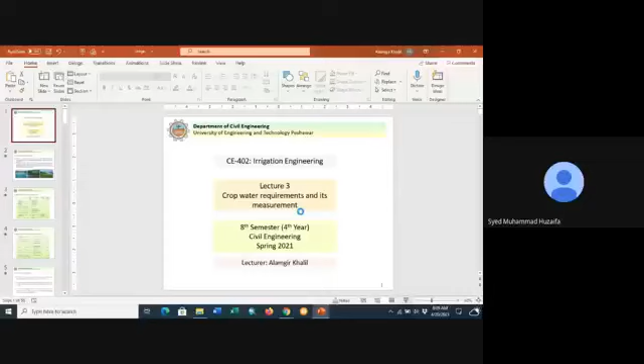This is lecture number 3 of the course Irrigation Engineering. In today's lecture, we will discuss the crop water requirements and its measurement.

Water requirements of crops. The term water requirements of crops means the total quantity and the way in which a crop requires water from the time it is sown to the time it is harvested. This is known as the water requirements of crops.

Different crops have different water requirements, and the same crop may have different water requirements at different places of the same country, depending upon variations in climate, type of soil, methods of cultivation, and useful rains that fall over the crops during the growth period.

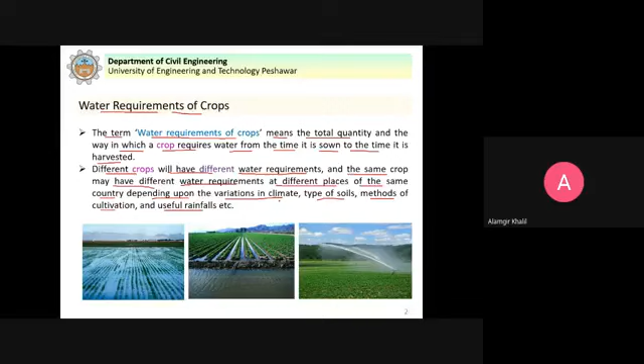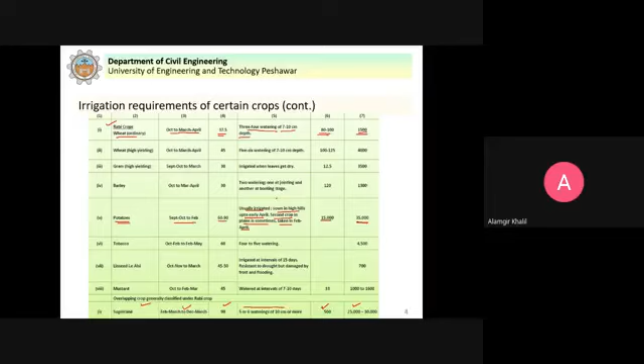Similarly we have sugar cane, grown from February, March to December or March - almost grown for the entire year. The average water depth required is 90 centimeters, with 5 to 6 waterings of 10 centimeters or more required. Seed required is 500 kg per hectare, and crop yield is 25,000 to 30,000 kg per hectare. This is general information on the irrigation requirements of certain crops, to get some idea.

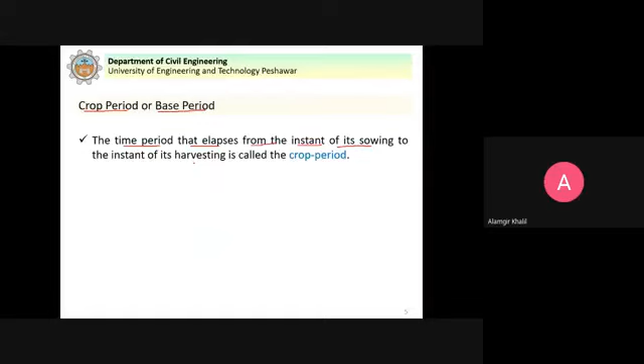Next we discuss the crop period or base period - some basic concepts. The time period that elapses from the instant of sowing a crop to the instant of its harvesting is called the crop period.

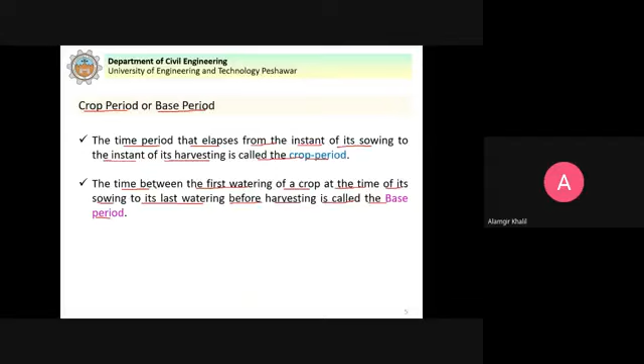The time between the first watering of a crop at the time of its sowing to its last watering before harvesting is called the base period.

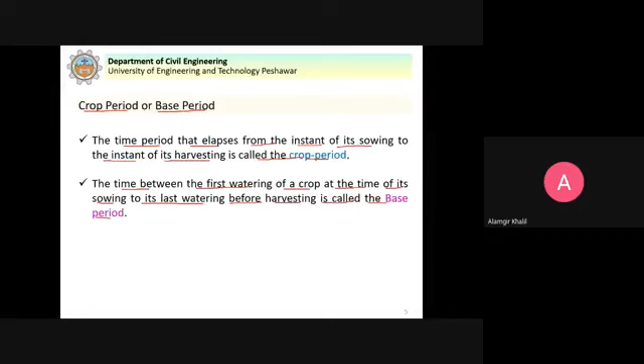There is a slight difference between the crop period and base period. Crop period is the time that elapses from the instant of sowing a crop to the instant of harvesting. Whereas the time between the first watering at sowing to the last watering before harvesting is called the base period. So the crop period is slightly more than the base period.

But for all practical purposes, they are taken as one and the same thing and generally expressed in B days. So B days denotes the crop period, and the base period is practically considered the same, denoted by B days.

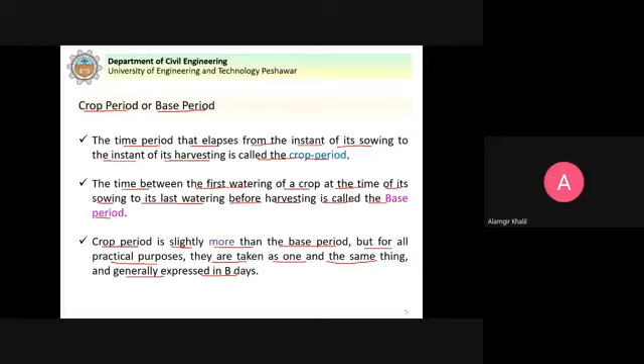Next, we discuss delta of a crop. Each crop requires a certain amount of water after a certain fixed interval of time throughout its period of growth.

Just like we saw in this table, maize has an average water depth required of 45 centimeters, and it has to be provided with irrigation requirements, the artificial supply of water for its growth, which is 4 to 5 waterings.

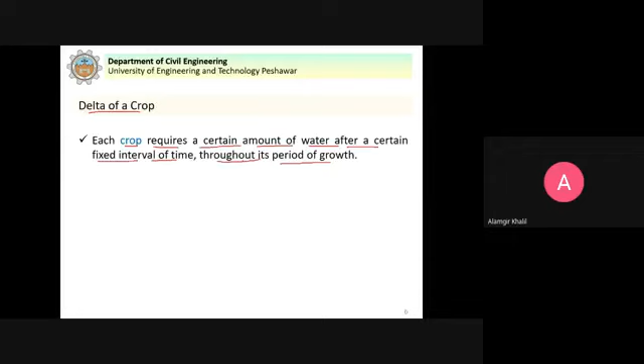Each crop requires a certain amount of water after a certain fixed interval of time throughout its period of growth. The depth of water required every time generally varies from 5 to 10 centimeters depending upon the type of crop, the climate of that area, and the soil conditions.

The time interval between two consecutive waterings is called the frequency of irrigation, and it is also known as the rotation period.

The total depth of water in centimeters required by a crop to come to maturity is called its delta. This is known as delta of a crop.

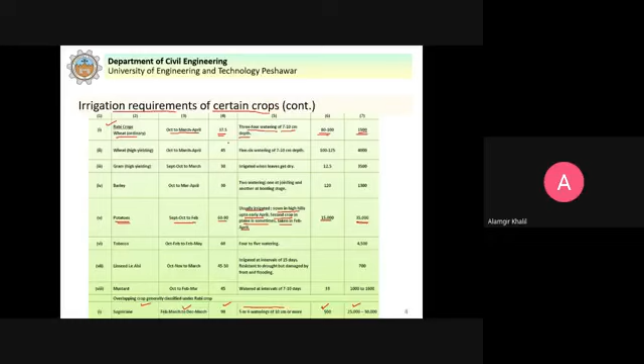For example, wheat requires 37.5 centimeters of water on average, so this is the delta for wheat. The total depth of water in centimeters required by a crop to come to maturity is called its delta.

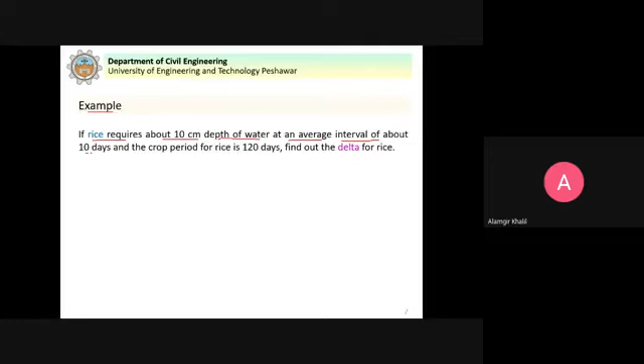For example, if rice requires about 10 centimeters depth of water at an average interval of about 10 days, and the crop period for rice is 120 days, find out the delta for rice.

Water is required at an interval of 10 days for a period of 120 days. Therefore, the number of required waterings will be 120 divided by 10, which is 12 waterings required.

Total depth of water required equals the number of waterings multiplied by the depth of each watering, that is 12 multiplied by 10, which is 120 centimeters. Hence the delta for rice is 120 centimeters, the total depth of water required by rice to come to maturity.

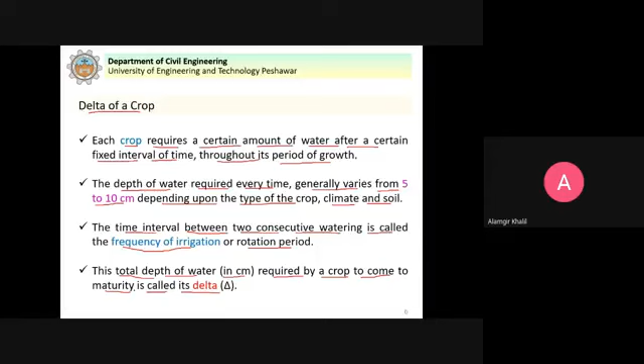Average approximate values of delta for certain important crops. For sugarcane, delta on field is 120 centimeters or 48 inches. For rice, it is again 120 centimeters or 48 inches. For garden fruits, 60 centimeters delta on field.

For cotton, 50 centimeters or 22 inches. For vegetables, delta on field is 45 centimeters or 18 inches. For wheat, it is 40 centimeters or 16 inches. For maize, 25 centimeters or 10 inches, and other crops.

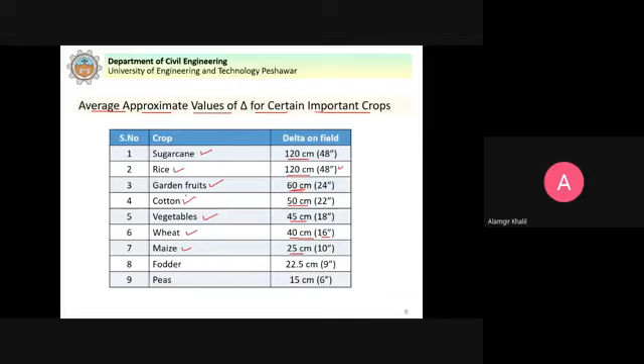So this is the delta, the total depth of water required for these crops to come to maturity. During the growth period, this is the total depth of water required for their full growth.

Next, we discuss some important units, starting with the acre foot. We have an area of 66 by 660 feet. This is 1 acre, which equals 43,560 square feet.

Now, if we have water over this area to a depth of 1 foot, this becomes an acre foot, which is the unit of volume. So 1 acre foot is equal to 43,560 cubic feet, the unit of volume.

In the previous lecture, we discussed this unit in detail when we covered the water budget of Pakistan, using million acre feet, where million is 10 power 6 and acre feet is the volume unit. So 1 acre foot equals 43,560 cubic feet. We have 1 acre, and if we have a depth of water over this acre, that volume is known as 1 acre foot.

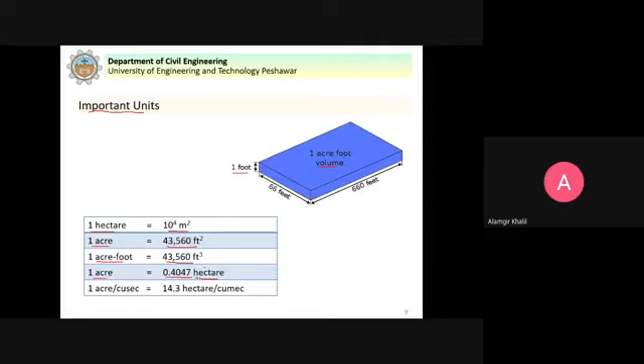Similarly, 1 hectare is equal to 10 power 4 square meters. And 1 acre is equal to 0.4047 hectare. This is how we can convert from hectare to acre and acre to hectare.

Next, we discuss duty of water. The duty of water is the relationship between the volume of water and the area of crop it matures.

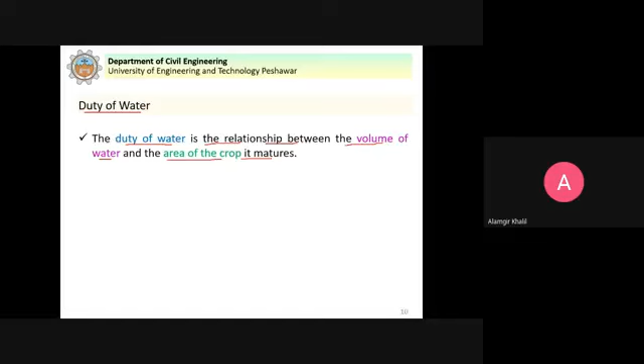How can we define it? It may be defined as the number of hectares of land irrigated for full growth of a given crop by supply of 1 cubic meter per second of water continuously during the entire base period of that crop.

So this is the duty of water. We can also define it in the FPS system as the number of acres of land irrigated for full growth of a given crop by supply of 1 cubic foot per second, 1 cusec, of water continuously during the entire base period of that crop. This means that for unit discharge of water flowing for B days, the base period of that crop, it matures D hectares of land.

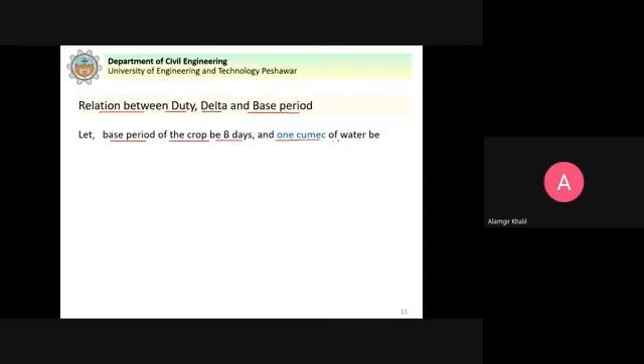Now we look at the relationship between duty, delta, and base period. Let the base period of the crop be B days, and 1 cumec of water be applied to this crop on the field for B days. The volume of water applied during B days will equal B multiplied by 24 hours, multiplied by 60 minutes, then 60 seconds, since B is in days.

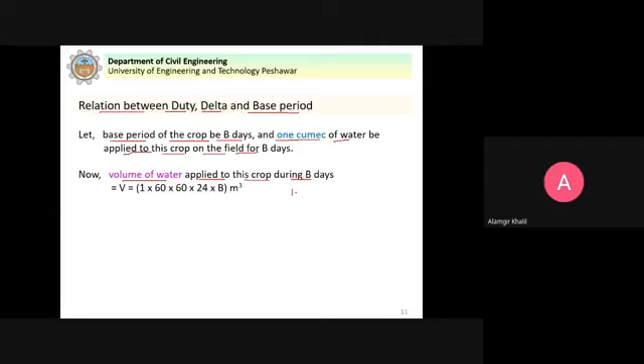The idea here is that we have, for example, 1 cubic meter of water. This is the volume, and this is for 1 second. So this is 1 cumec of water.

Now we want to find the volume for B days, if it is flowing for B days. That will be equal to 24 multiplied by 60 multiplied by 60, giving us the volume in cubic meters, which equals 86,400 times B cubic meters.

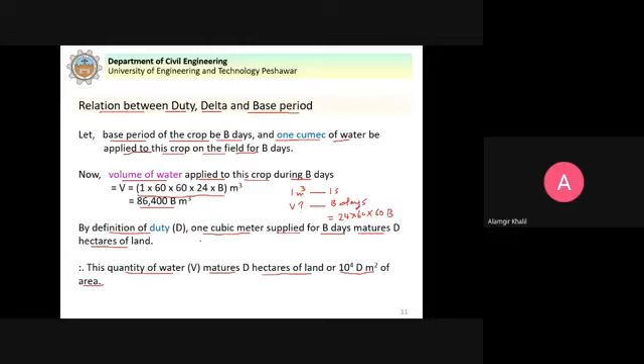Now, by definition of duty, 1 cubic meter per second supplied for B days matures D hectares of land, or 10 power 4 into D square meters of area. So the total depth of water applied on this land is simply equal to volume divided by area. We have this volume and this much area, so by definition, this total depth of water is called delta.

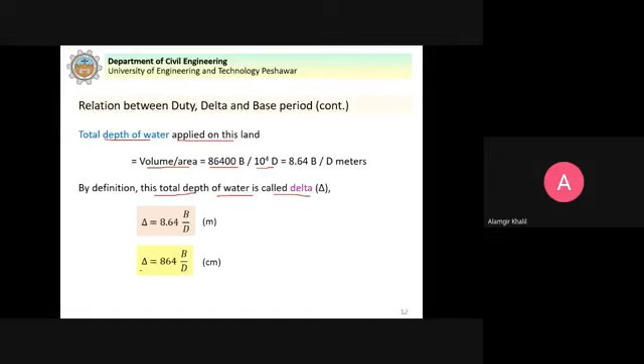So delta is equal to 8.64 B by D. This delta will be calculated in meter, or multiplied by 100, so delta is equal to 864 B by D in terms of centimeter. So delta is in centimeter, B is in days, and D is the duty in hectares per cubic meter per second.

This is the relationship between the duty of water, delta of crop, and the base period of the crop. In the FPS system, we get this relationship for delta: delta is equal to 1.983 B by D, or approximately 2 into B by D. So delta will be in feet, B is in days, and D is the duty in acres per cubic foot per second.

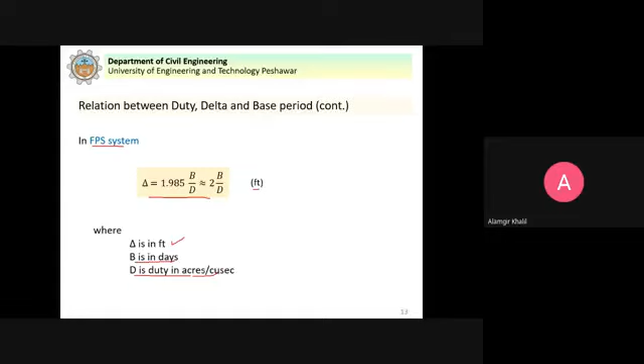Next, we discuss factors affecting the duty of water. The first factor is the type of soil.

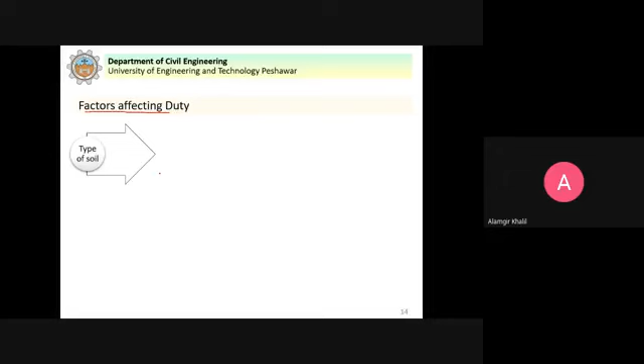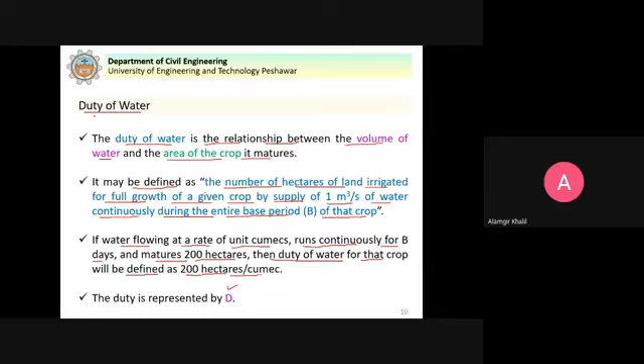So we have coarse grained soil. Percolation losses will be high, and this will result into low duty. When water is lost, the area that it will irrigate will decrease, so it results into low duty. The duty definition is the number of hectares of land irrigated for full growth of a given crop by supply of unit discharge continuously during the base period. So if there are losses, the number of hectares of land irrigated will decrease, which will decrease the duty of water.

So we have coarse grained soil, percolation losses are high, and this will result into low duty. Fine grained soil has less percolation losses, and this will result into high duty of water.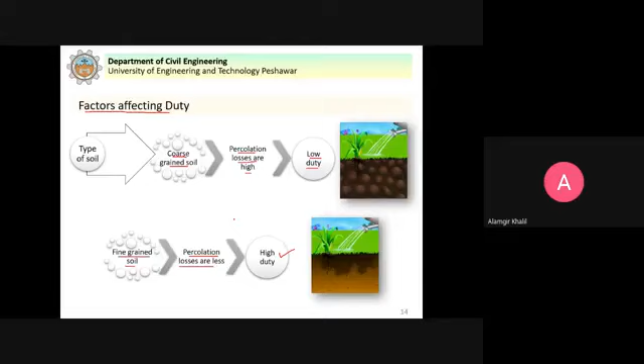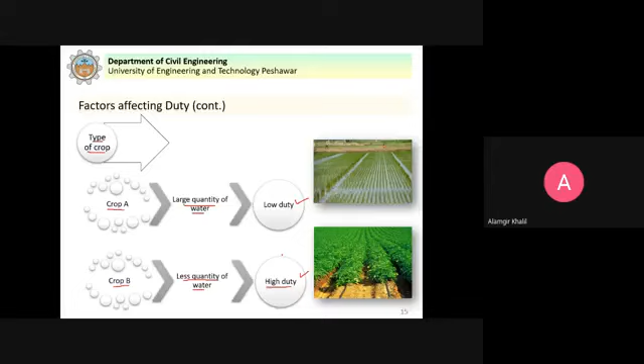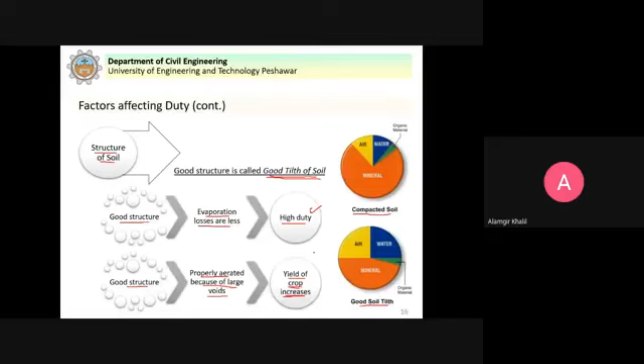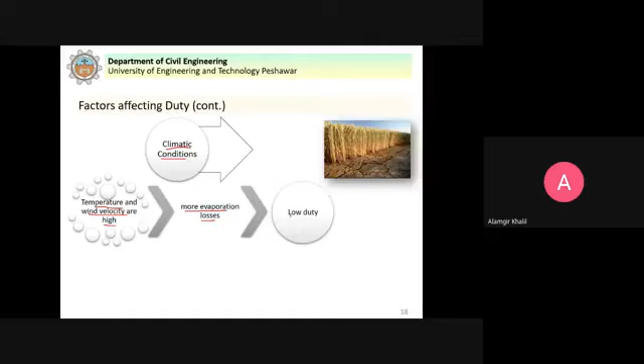Next we have climatic conditions. When temperature and wind velocity are high, this results into more evaporation losses, and as more water is evaporated, this results into low duty. If we have rainfall during the base period, there is less irrigation requirement, meaning high duty of water, because during rainfall the crops already get some water, so less quantity of water is required to bring it to maturity, meaning less irrigation requirement and high duty.

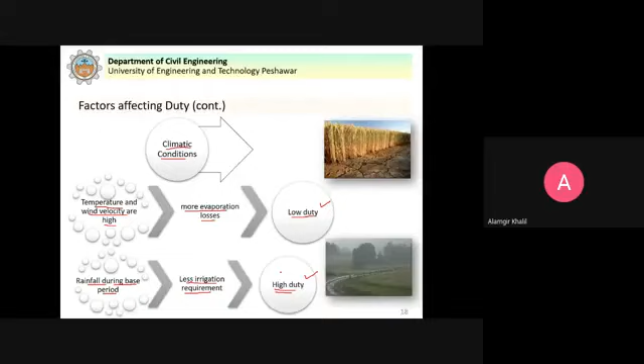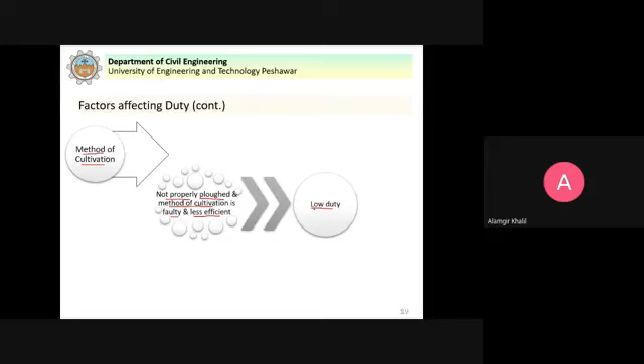Method of cultivation: if the land is not properly plowed, and the method of cultivation is faulty and less efficient, this results into low duty of water. If land is not properly prepared for cultivation, proper irrigation cannot be done, resulting in low duty. If properly plowed and made quite loose, water retention capacity increases, the number of waterings required reduces, and this results into high duty of water. That's why land preparation during sowing of the crop, and then supplying water to the crop, is very important.

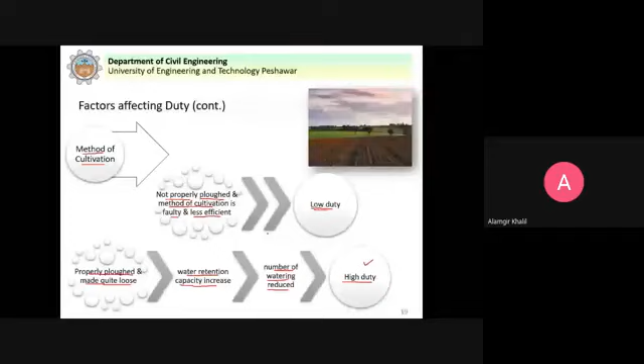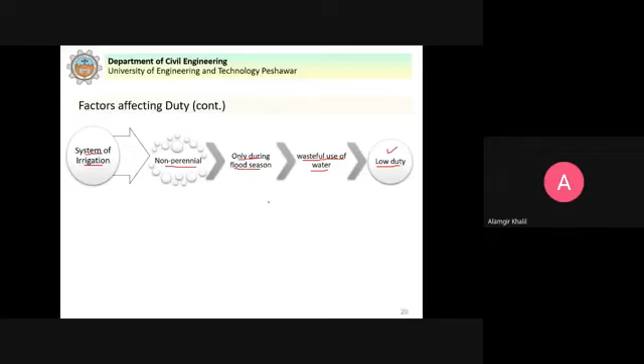System of irrigation: non-perennial versus perennial. Perennial means water is continuously flowing, while non-perennial means water is not continuously flowing and is only available during flood season. Wasteful use of water can result in low duty. When we have a perennial system where water is available in adequate quantity throughout the base period, water application throughout the growth period keeps soil continuously wet and less quantity of water is required, resulting in high duty of water.

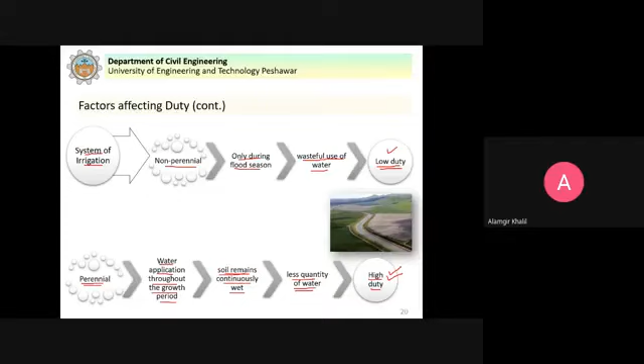During the flood season, we supply more water than is actually required. This results in wasteful use of water and consequently a low duty of water. But in a perennial system, we already have the water that we can supply, so the soil remains continuously wet. This results in less quantity of water being used and a high duty of water.

For application of water, we have the drip irrigation system, which is the most efficient and results in very high duty of water. As we studied in the previous lecture, in drip irrigation, through a network of pipes we supply water directly underneath the plants and crops. This results in saving of water, so it is most efficient and consequently has a very high duty of water.

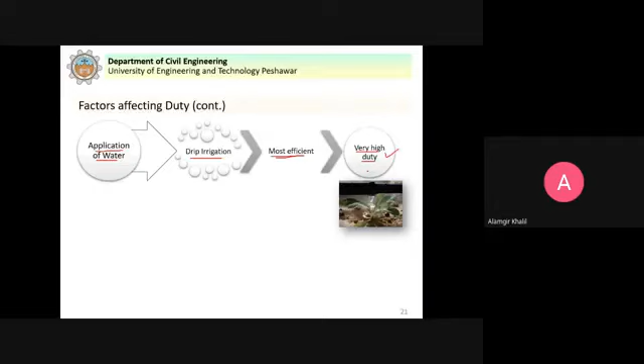For the sprinkler irrigation system, where we sprinkle water over the crops, seepage losses are reduced as compared to flooding techniques. This sprinkler irrigation is in the form of artificial rain and results in high duty, though it is less than the drip irrigation system.

Now the surface irrigation system, the flooding technique, where we flood the area of the crops with water, results in more waste of water and consequently a low duty of water. So these are some of the factors which affect the duty of water.

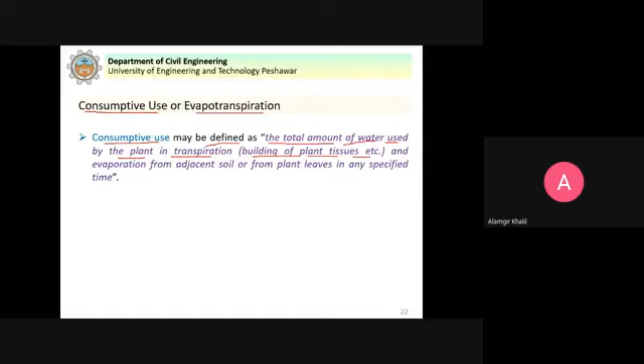Next we discuss consumptive use, or evapotranspiration. Consumptive use may be defined as the total amount of water used by the plant in transpiration, that is building of plant tissues, etc., and evaporation from adjacent soil or from plant leaves in any specified time. This is also known as evapotranspiration.

Consumptive use is the total amount of water used by the plant in transpiration, that is building of plant tissues, the water the plant uses for its growth, and evaporation from adjacent soil or plant leaves in any specified time. So what is the difference between delta and consumptive use? The delta of the crop that we studied is for the whole period.

That is, for the whole period of the crop growth, the total depth of water required during the entire growth period of the crop, that is known as delta.

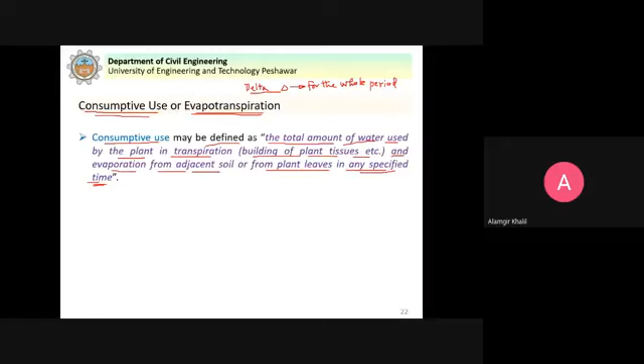The values of consumptive use may be different for different crops, and may be different for the same crop at different times and places, because crops require different amounts of water depending upon climate conditions and soil conditions.

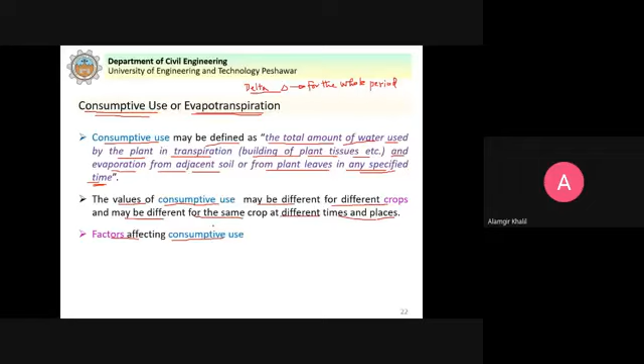Factors affecting consumptive use are the same factors on which transpiration and evaporation depend. For example, temperature: if temperature is more, evaporation and transpiration will be more, and consequently consumptive use will be more.

Sunlight: plants require it for building tissues through the photosynthesis process, so if sunlight is available, plant transpiration will be more. Similarly, humidity and wind movement matter - if there is more wind blowing, evaporation from the surface will increase because the wind takes away vapors, increasing the rate of evaporation.

Similarly, we have soil topography, precipitation, method of irrigation, and depth of water applied for irrigation. All the factors on which transpiration and evaporation depend, consumptive use or evapotranspiration will also depend on.

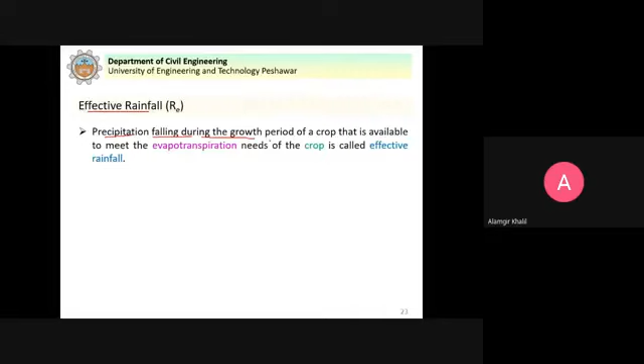Next, we define effective rainfall. Precipitation falling during the growth period of a crop that is available to meet the evapotranspiration needs of the crop is called effective rainfall. In irrigation, effective rainfall is that precipitation falling during the growth period of the crop that is available to meet the consumptive use, or evapotranspiration needs, of the crop.

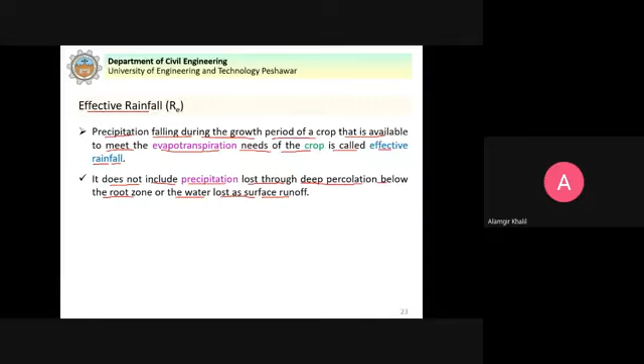It does not include precipitation lost through deep percolation below the root zone or water lost as surface runoff. So that part of the precipitation used by the crops in meeting evapotranspiration needs is known as effective rainfall.

This effective rainfall does not include precipitation loss through deep percolation, where water infiltrates into the soil and travels downward. This deep percolation joins the groundwater zone of saturation, below the root zone, because this water, if it travels vertically downward below the root zone, the plants will not be able to extract it. That's why it will not be part of the evapotranspiration needs, the water that the plant extracts. And the water lost as surface runoff.

In hydrology, you might have studied that we have total rainfall minus abstractions. Abstractions are all the losses, for example, the water infiltrated, evaporation, and other depression storages. So what was left appears as surface runoff. This was actually called effective rainfall in hydrology, that which appears as surface runoff.

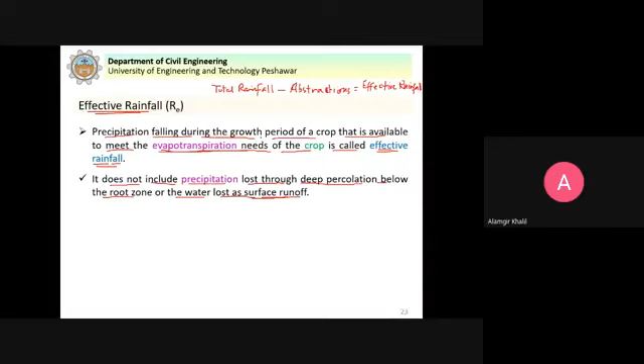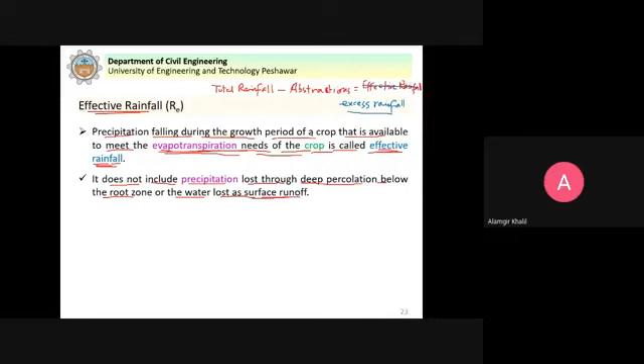But then there was a confusion, because in irrigation or agriculture, people say that effective rainfall is that part of the rainfall falling during the growth period of the crop that is available to meet the evapotranspiration needs of the crop. Consequently, in hydrology, we now call the runoff portion as excess rainfall, that is the rainfall that appears as surface runoff. And we reserve the term effective rainfall for precipitation falling during the growth period of the crop that is available to meet the evapotranspiration needs.

Next, we define consumptive irrigation requirement. It is the amount of irrigation water required in order to meet the evapotranspiration needs of the crop during its full growth. It is therefore consumptive use exclusive of effective precipitation, stored soil moisture, or groundwater. So it is the irrigation water that we artificially have to supply.

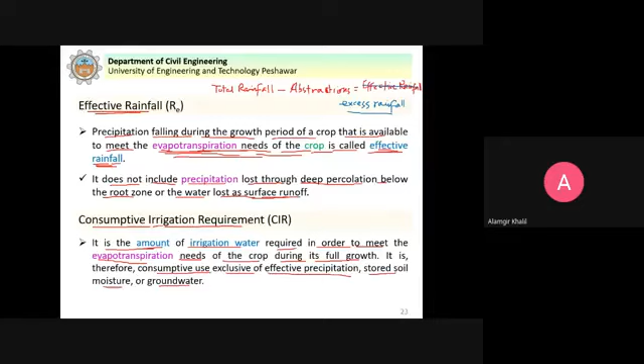So it is that amount of irrigation water required in order to meet the evapotranspiration needs of the crop during its full growth, the water that we have to artificially supply. That is known as consumptive irrigation requirement. It is therefore consumptive use exclusive of effective precipitation, stored soil moisture, or groundwater. So consumptive irrigation requirement is equal to consumptive use minus effective rainfall.

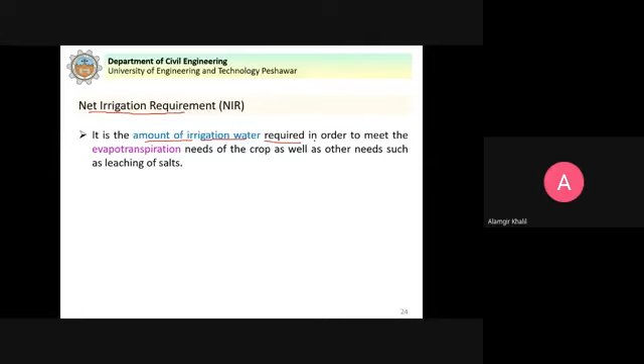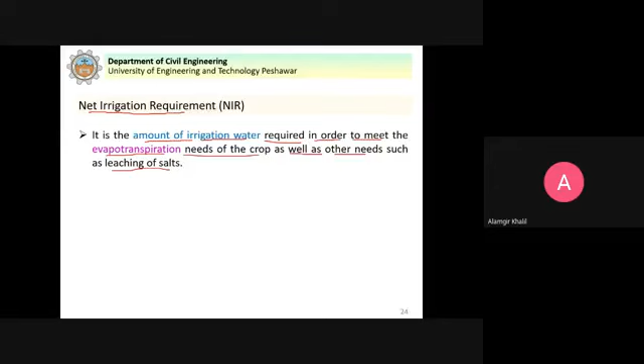Next, we have net irrigation requirement. It is the amount of irrigation water required in order to meet the evapotranspiration needs of the crop as well as other needs such as leaching of salts. So in addition to meeting evapotranspiration needs, we need to supply water for leaching of salts, removal of salts from the soil, because sometimes salts are present in the soil which are not beneficial, causing salinity, harmful salts.

So how to remove them? We have to provide additional water that can dissolve these salts, and then that water can be drained, either by surface drainage or subsurface drainage, to remove these salts. This is known as leaching of salts. So net irrigation requirement is the amount of irrigation water required to meet the evapotranspiration needs of the crop as well as other needs such as leaching of salts. It equals consumptive use minus effective rainfall plus water lost in deep percolation for leaching.

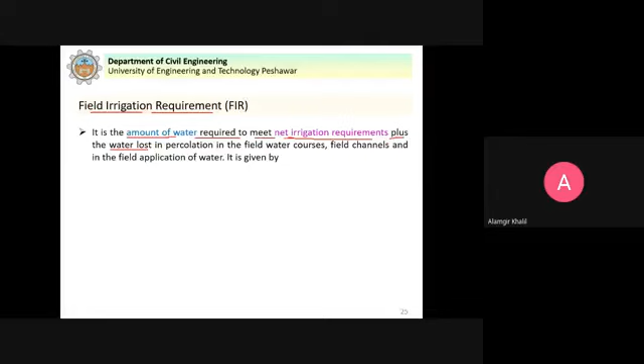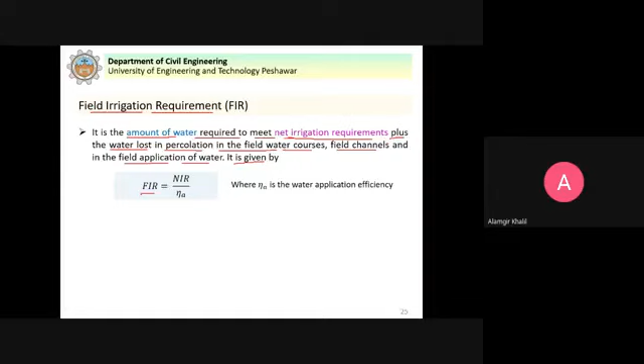Another term is field irrigation requirement. It is the amount of water required to meet net irrigation requirements plus the water lost in percolation in the field water courses, field channels, and in the field application of water. It is given by: field irrigation requirement equals net irrigation requirement divided by eta A, where eta A is the water application efficiency.

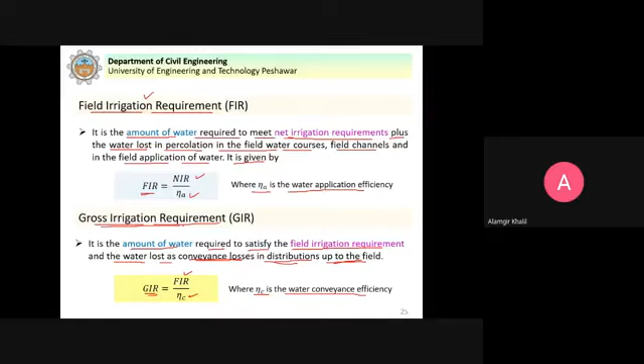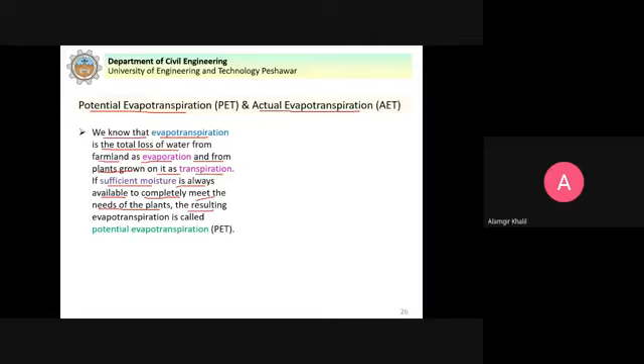If sufficient moisture is always available to completely meet the needs of the plants, the resulting evapotranspiration is called potential evapotranspiration. That is, evaporation plus transpiration from the plant leaves under unlimited supply of water. When there are no limitations on the supply of water, if sufficient moisture is always available to completely meet the needs of the plants, under that condition the evapotranspiration that takes place is known as potential evapotranspiration. The real evapotranspiration occurring in a specific situation is called actual evapotranspiration.

Whereas actually in crops we cannot have unlimited soil moisture or supply of water, the real evaporation or evapotranspiration occurring in a specific situation is called the actual evapotranspiration.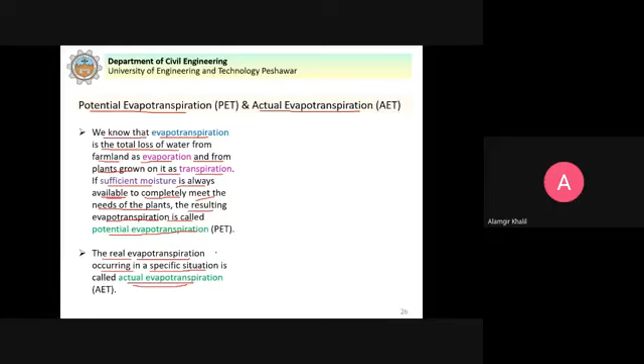Now, what is the concept of these two? You can see here ETO, also known as the reference evapotranspiration or potential evapotranspiration, but it's commonly called the reference because it is for a reference crop such as grass. You will see this terminology when you discuss evapotranspiration, known as reference evapotranspiration, reference ET. This reference evapotranspiration we actually calculate using available equations, for a well-watered grass as the reference crop, so that's why it's known as reference evapotranspiration, denoted by ETO in the literature.

This reference evapotranspiration is mainly a climatic parameter. When we calculate it, mostly we consider the climate data for that area. So in order to make it applicable to crops, this ETO, the reference evapotranspiration, is multiplied by a crop factor, Kc. Crop factors are calculated for different crops and are available in tables in the literature. We multiply the reference evapotranspiration with the crop factor to get the crop evapotranspiration, reflecting that specific well-watered crop under optimal agronomic conditions.

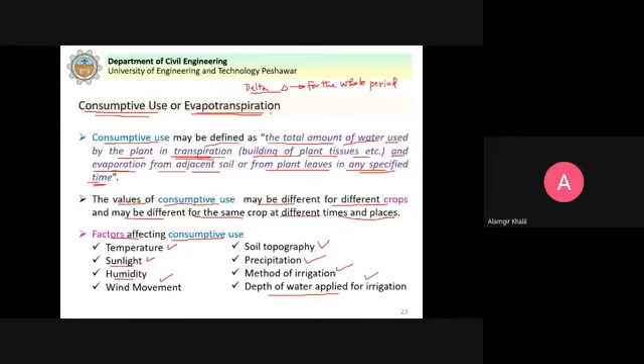So these are some basic terms. Next, we study how to estimate consumptive use, also called evapotranspiration for crops. So how can we measure this?

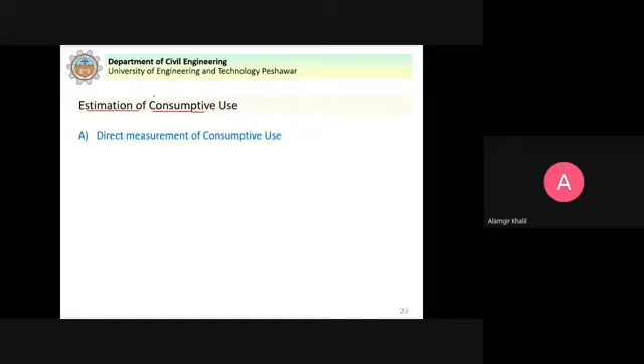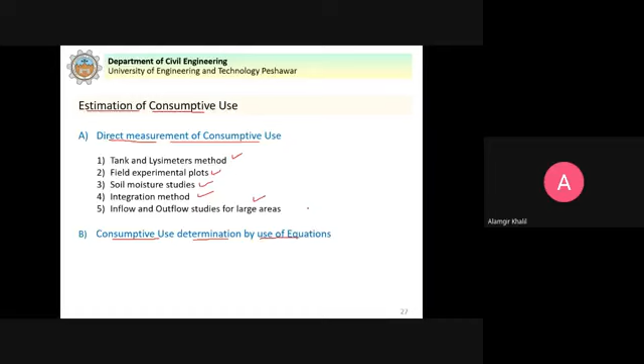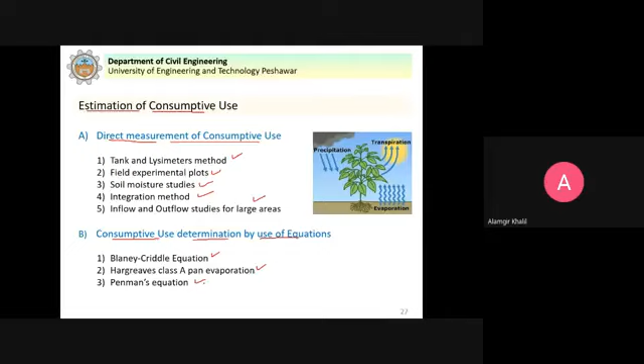We have direct measurement of consumptive use. For this we have different methods available: tank and lysimeter method, field plot experimental plots, soil moisture studies, integration method, and inflow-outflow studies for large areas. We can also calculate consumptive use using equations that were developed, including the Blaney-Criddle equation, Hargreaves class A pan evaporation, and Penman's equation. We'll discuss these methods briefly in detail.

First, we have direct measurement of consumptive use by tank and lysimeters. How do we measure it? Tanks are containers set flush with the ground level, having an area of 10 meter square and 3 meter deep. The larger the size of the tank, the greater the resemblance to root development, which will reflect more natural conditions.

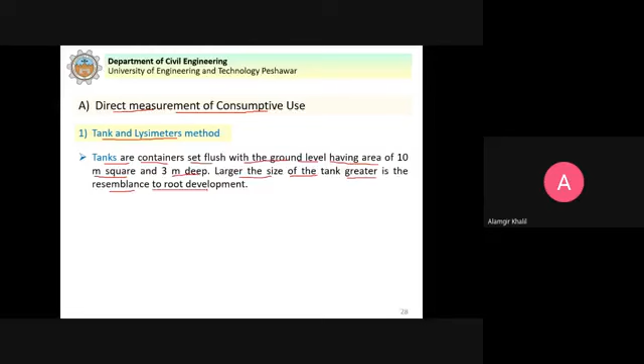Consumptive use is determined by measuring the quantity of water required to maintain constant moisture conditions within the tank for satisfactory proper growth. The consumptive use is the water required by the plants to meet its evapotranspiration needs, assessed by measuring the quantity of water needed to maintain constant moisture conditions within the tank for satisfactory growth.

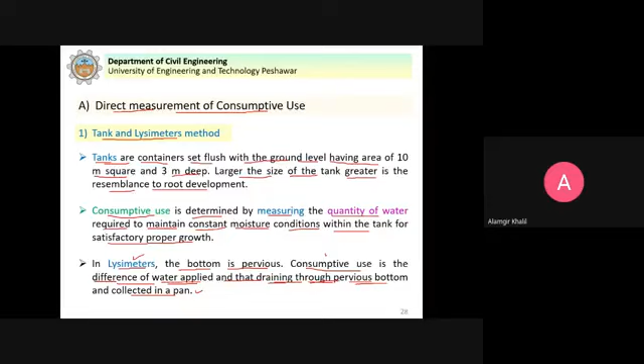In lysimeters, the bottom is pervious. Water is supplied to the crops grown in these lysimeters, which are containers like water tanks used to grow the crops. The crop uses the water for its evapotranspiration needs, and the remaining water drains through the pervious bottom and is collected in a pan. Consumptive use is the difference between the water applied and the water drained and collected at the bottom.

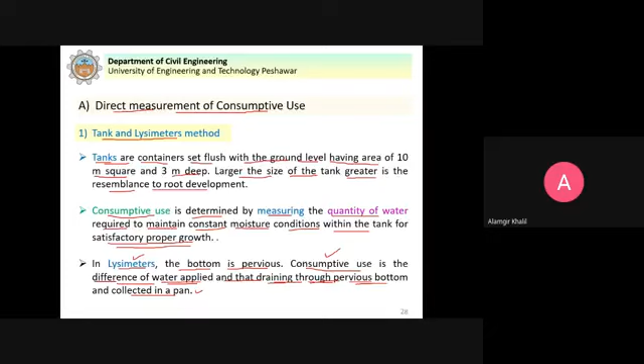In case of the tank, consumptive use is determined by measuring the quantity of water required to maintain constant moisture conditions within the tank for satisfactory growth of the crop. This is how we estimate consumptive use. In case of lysimeters, water is collected from the pervious bottom, and the difference between water applied and water drained gives us the consumptive use.

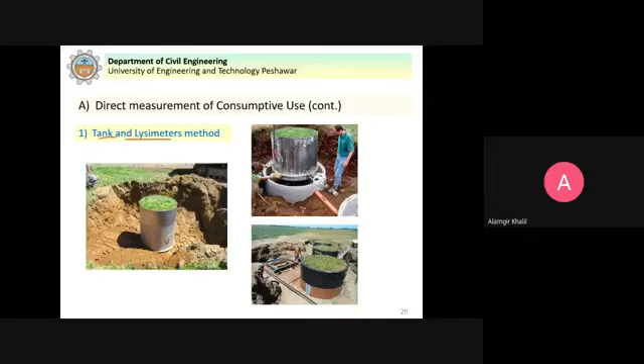These lysimeters are very expensive to install. Here we try to replicate the natural conditions of crop growth by supplying water, so this is actually very expensive. Plus, lysimeters are very sensitive instruments. The water applied and the water that drains has to be collected in a pan so that we can effectively measure the difference between water applied and water drained at the bottom, in order to calculate the consumptive use.

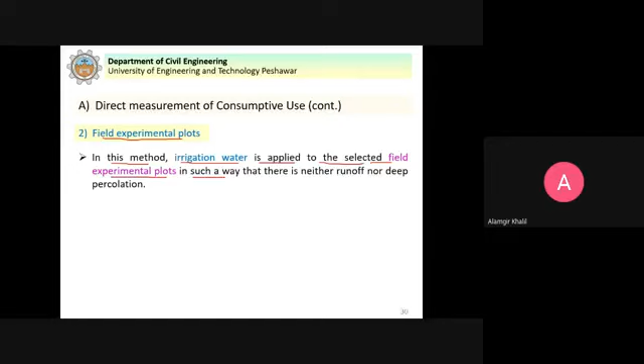The second method is field experimental plots. In this method, irrigation water is applied to selected field experimental plots. The area is divided into different experimental plots in such a way that there is neither runoff nor deep percolation.

Yield obtained from different fields is plotted against the total water used, and as basis for arriving at the consumptive use, those yields are selected which appear to be most profitable. The area is divided into different experimental plots, irrigation water is supplied so that there is neither runoff nor deep percolation, and yield from different plots is plotted against total water used to determine the most profitable consumptive use.

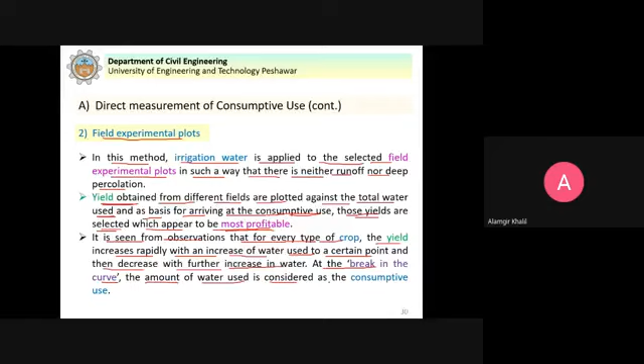It is seen from observations that for every type of crop, the yield increases rapidly with an increase of water used up to a certain point, and then decreases with further increase in water. At the break in the curve, the amount of water used is considered as the consumptive use.